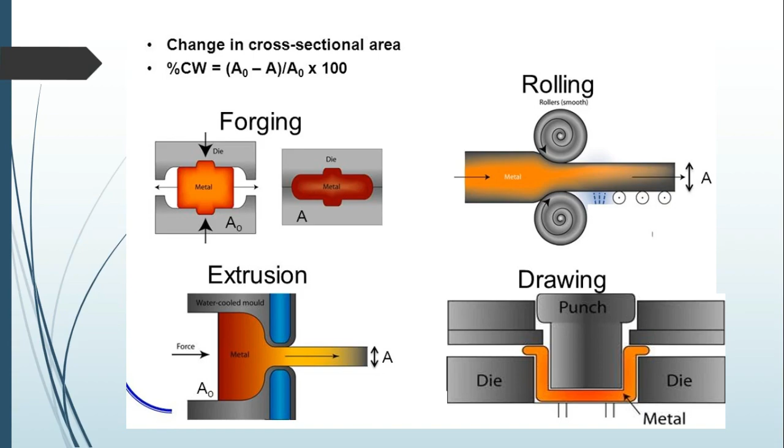And a quick review of the metal forming process. Let me check. First one is forging, then rolling, extrusion, drawing. Remember, in forging we have a die. In between we are placing the metal. Okay, and you see the initial and final product. The shape is getting changed, but the material amount we have taken is the same amount. There is no wastage. Okay, this is the thing I want to convey to you from these slides. And for making these types of changes we have various types. One by one we will see.

Now before going to forging, I want to give the practical photos of where and how we are doing the forging process. You may see the first figure, and the second one is manual, the third one is automatic, and the fourth one is also automatic, and the fourth one, if you see, is one of the automobile engine components. I will not tell which component it is. Please go through the internet or refer to the books and tell me what that component is, and also you should know what is the specialty of this component where we are using it.

Okay, right. Next one, and most probably you guys may have seen this thing. Yes, a sword. When you're watching the Lord of the Rings and some other movies, the very old Asian movies, most of the time they will use forging to make the sword. Why? Because when you are striking another enemy, huge impact forces will come. Your sword must withstand the huge impact. So forged components always withstand impact forces, and there is one small beautiful physics behind it, and I will try to explain it at the end. If not, it is your responsibility to check out what is the science behind it and what is the beauty of forged components. Okay.

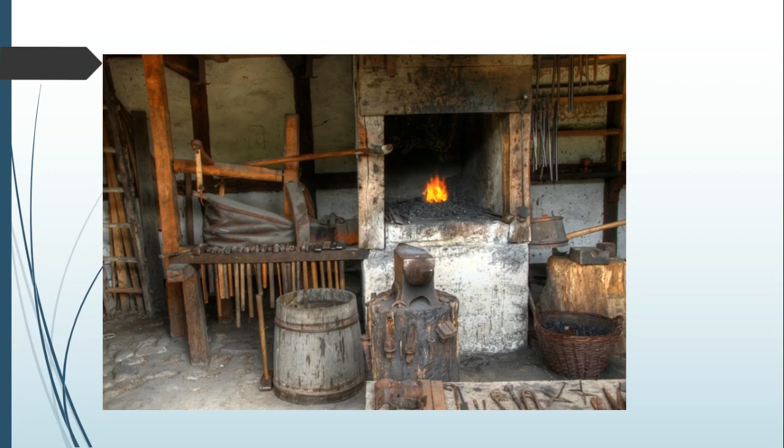Now we have components like hammers and an anvil, one small furnace, or the furnace is not available here. For making the instant heat we have some options. Oh, right. So what is the correct terminology? Find it from the internet. And tongs, you can see here we have a variety of tongs, hammers, anvil, and where we are going to heat the metal. Most probably we have one open hearth furnace, or you check out what the thing is and what its input is, that also you have to check.

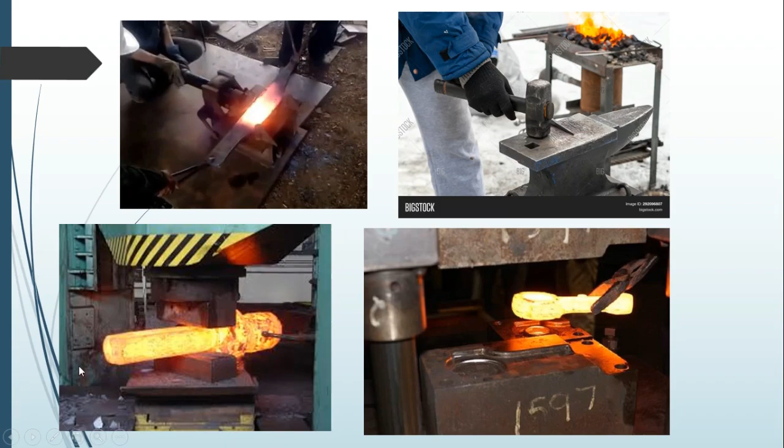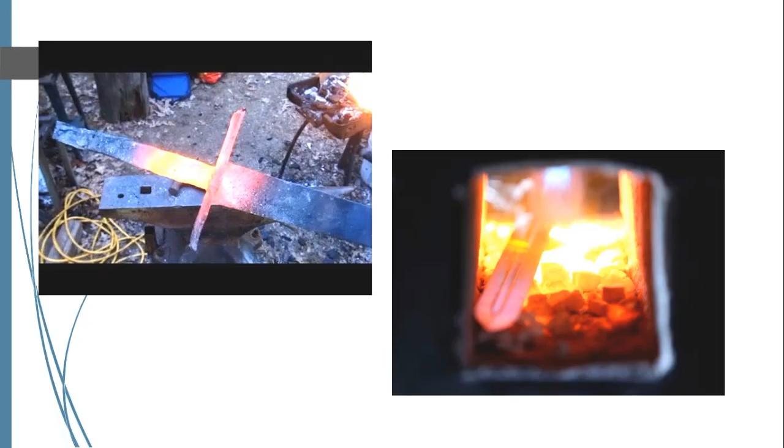Okay. Now these are called tongs. You can see different shapes of tongs are available, because in the previous slides you have seen that components are somewhat different. You see here a somewhat thin and lean component. Here you can see a square shape and complicated shape, etc. To hold this thing we need tongs, because the material will be red hot. You can see it is red hot. You cannot use your normal hand to hold this thing, and you cannot use any gloves to grip it. So we need something different, which should be able to support the forging process. That is nothing but tongs, and for that we have different types of tongs.

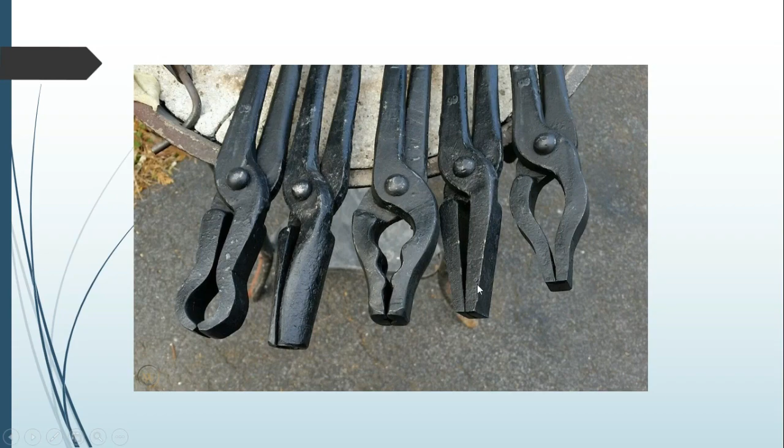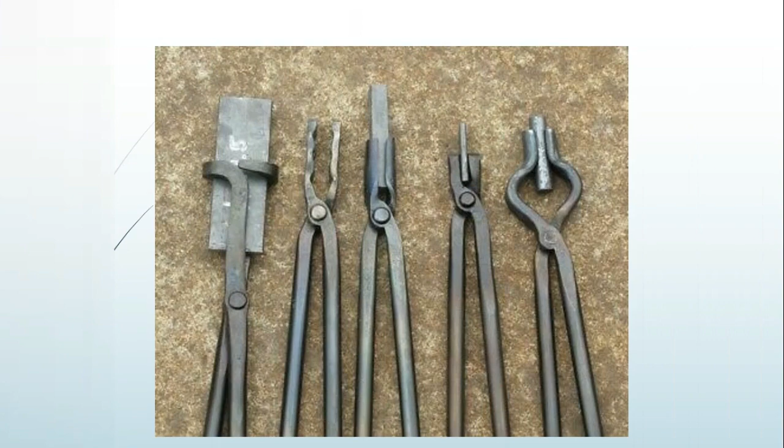These are all different types of tongs, and you can see the close view of the tongs, and they are able to grab various types of materials. And let me check the next video clip. You may have some ideas. Absolutely, you can see flat, rectangular, square, not circle, cylindrical components are available. Not only this, when you are going to do some bending operations, we have different types of hammers. When you want to do normal flattening, you also have different components.

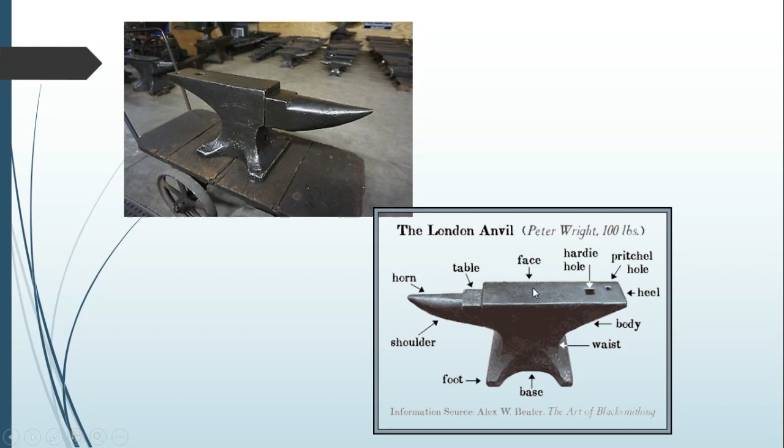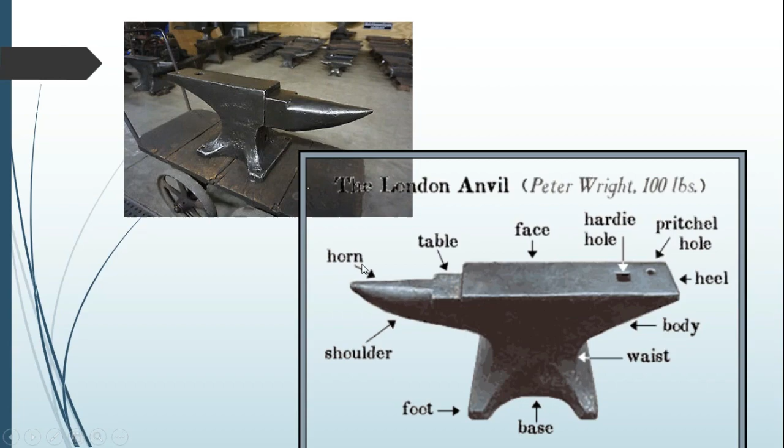Okay, the major thing is the anvil. This is the thing we mostly see in the blacksmithy lab, that is the anvil. We have different portions available. These portions are used to make complicated shapes. Suppose you want to make an S hook, you can make the bend over here, and you can use the hand to make the initial bend. Then you can place the workpiece over here, and you can give force so that it is perfectly bent. Okay. So these are all the things, and we have various parts: base, foot, shoulder, horn, table, heel, body, etc. Okay, and some of the hammers.

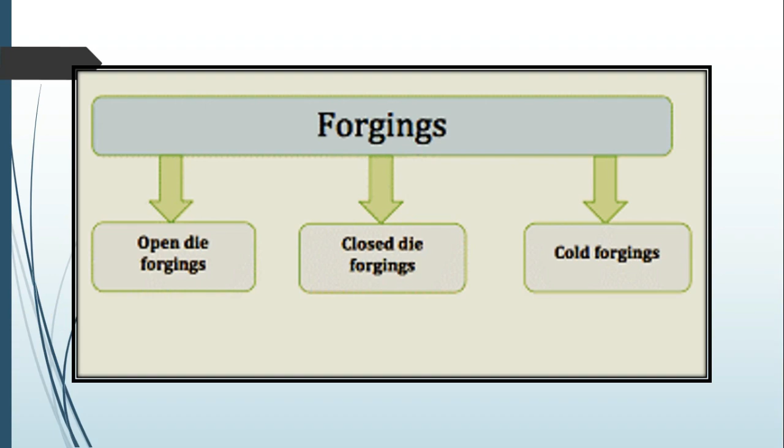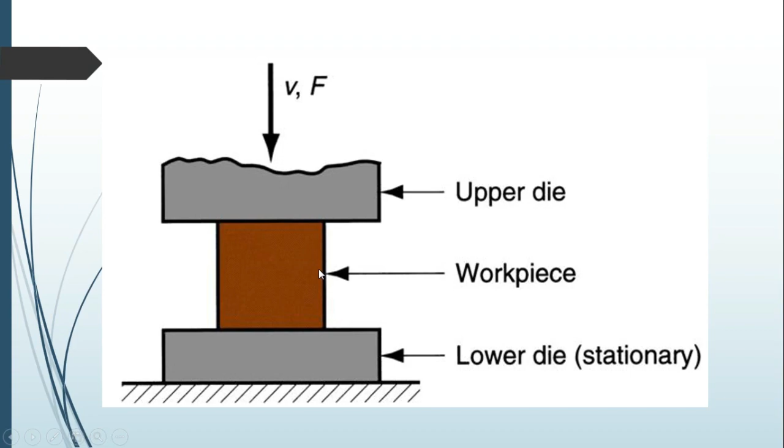And there are 3 types of forging available: open die forging, closed die forging, and cold forging. And apart from this, we have another 3 more classifications also. We will see, it depends upon your book, but everything is categorized under this only. Now, open die forging means there won't be any closure. See, this portion is empty. Here also it is empty. Whenever you give the force, it will deform. That's it. Finally, we can take it. The piece is placed between the upper die and lower die. Right? Got it? So, open die forging will be like this.

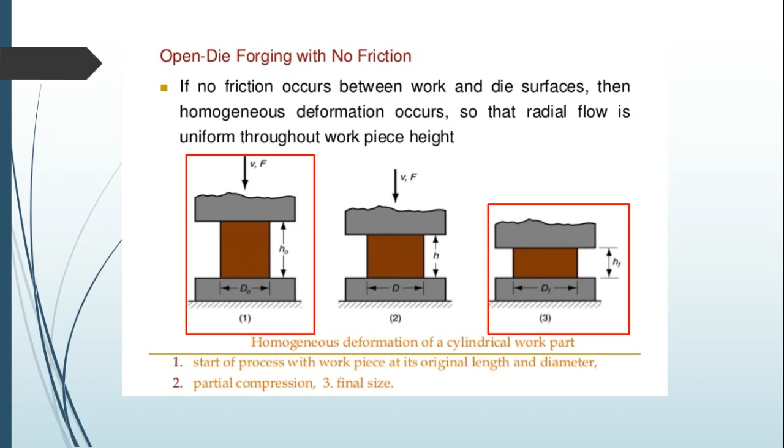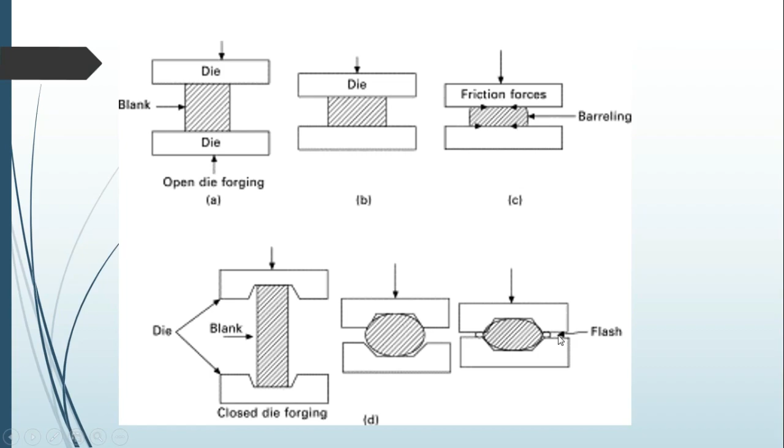So, initially it will be H0. In between it is H. When you are finishing the component, it is HF. For your better understanding, I can show that. See, there is no material wastage. The shape of the material, from the initial workpiece to the final finished product, is changed. That's it. Now here I have one more example, but here we are going to focus on closed die forging. You can see open die forging, this is closed die forging, and this die portion is going to close the path so that no metal will come out. If extra metal is available, that will come out as flash because of the huge impact.

Now, to make it automatic, we have the forging press, which does the same operations. First we have to hold it, then give the force; it will come and contact the workpiece, and by the third attempt it will give a perfect workpiece or output.

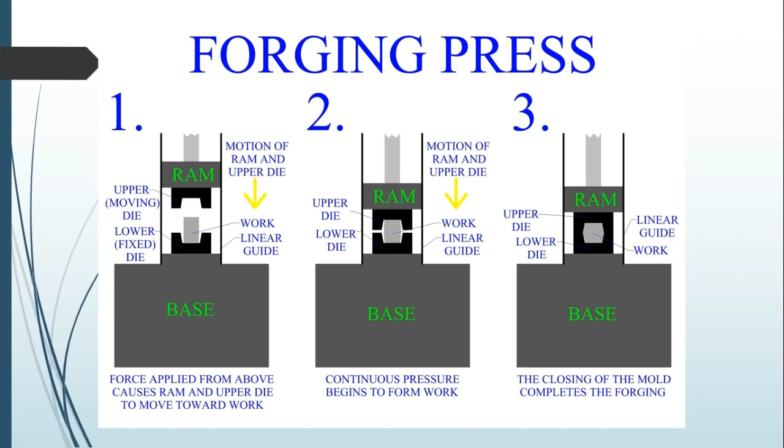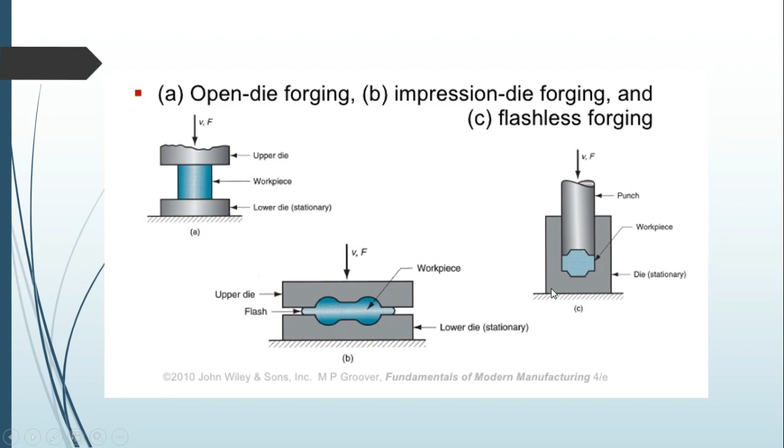Similarly, we have open, closed and flashless. If you see the difference between closed and flashless, you will understand what it is. The material cannot escape and it will be fully deformed into perfect shapes depending upon the punch and die shapes. And we have some complicated shapes like this.

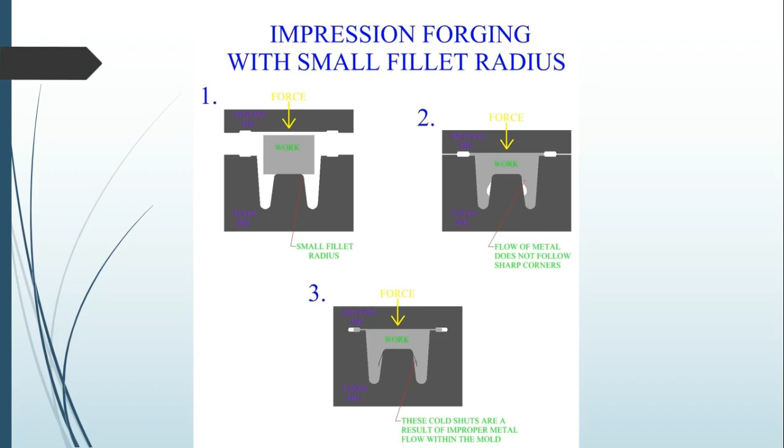If you don't know what a cold shut is, just go to casting defects and rectifications; I have clearly explained it there. And why am I putting these slides over here? Students, we can make any complicated shapes, but you should know the design for manufacturing aspect ratio, so that you can take the exact amount of material and fulfill whatever you want.

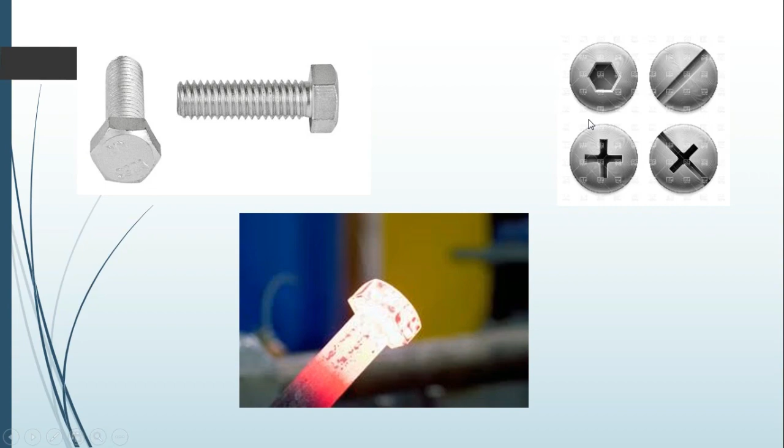Now another thing is the bolt. Nut and bolt we use every day, and this is the bolt where we put the thread, and this is the bolt head. You can see it is in the red hot stage, and we have different shapes depending upon the Allen key, screwdriver, square driver, etc. How are we making this profile? That process is called upsetting and heading.

Upsetting is nothing but: first you take the piece of material and grab it, and it is still hot. Don't say that it is at room temperature, it is hot. Next, after gripping, we have to check how much material we need. After that, we move the punch with high velocity and force, so that the material will be deformed into this exact shape. That's it.

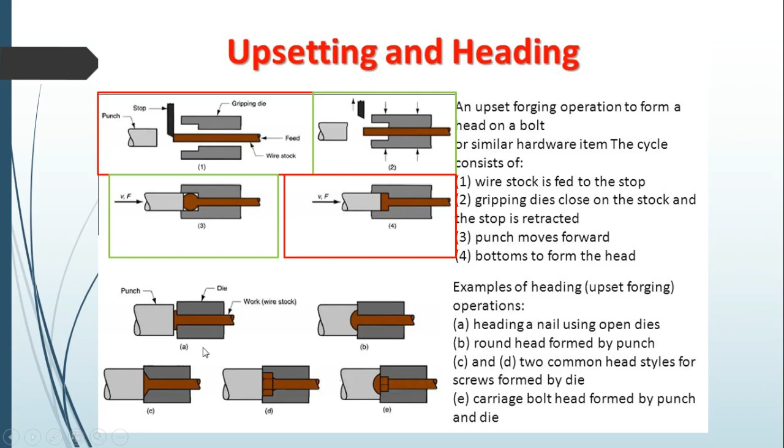Similarly, we are going to make the heads for the nut and bolt. Different heads I have shown in the previous slide. Similar head shapes will be placed in the punch, and according to that we get the heads.

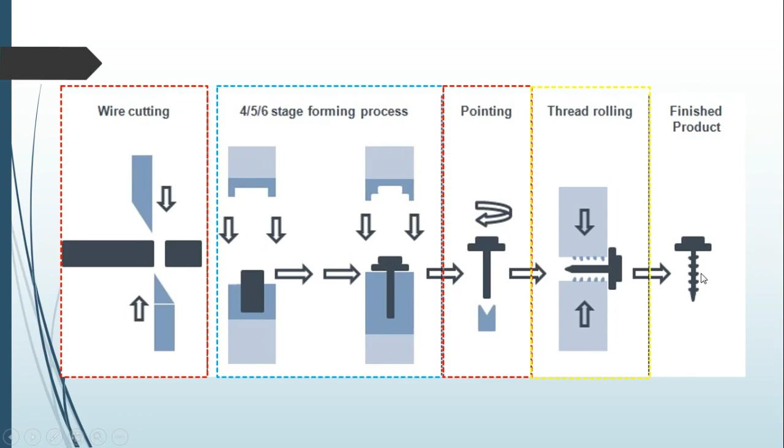Now, in detail, here is how we make the bolt. Initially we cut a small portion from the wire, then place it in the appropriate punch and die. After that the die comes, the punch comes and makes the required shape. It is taken out, then pointing, then we go for thread rolling. Finally, a bolt is in your hand. The same process for different types of heads is available over here.

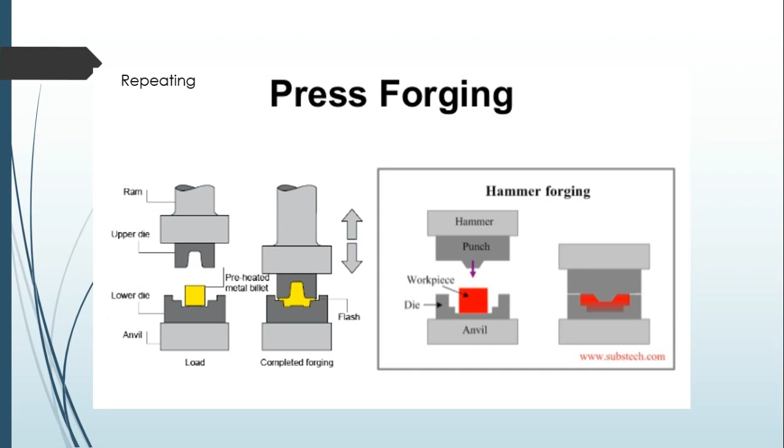Press forging is also one of the repeated topics we already discussed. If you want, you can use this image for better understanding. And here, impact extrusion. Once you see this shape, you may identify the product of this process. There is an impact punch; when you have a piece of material and drop it from some height, it will come and close it, and finally we get some shape. You may guess what product it is. If you guessed, you are brilliant.

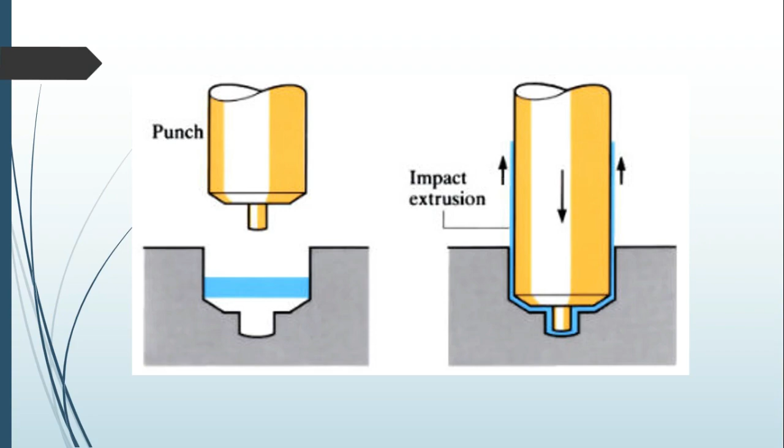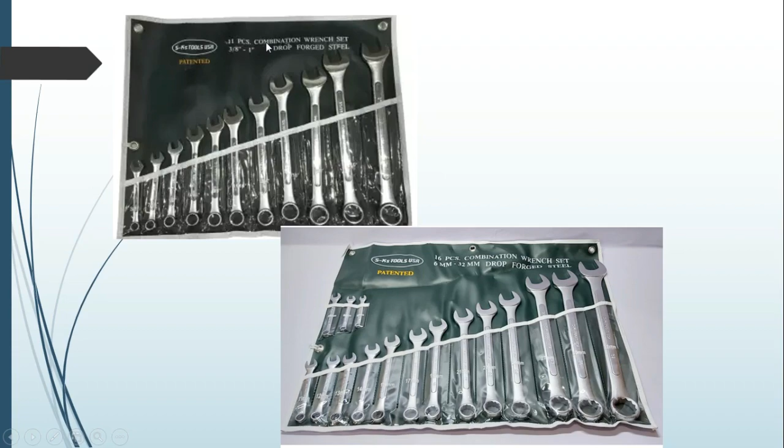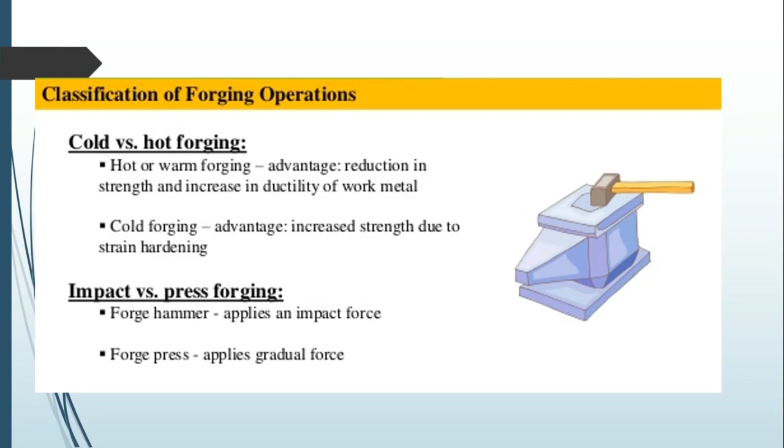Another thing is spanner sets, which are also made by the forging process, and you can see it is drop forged steel. So every component has its own strength. Cold versus hot forging: when you process well above the required temperature, it is hot; at normal temperature, slightly above room temperature, it is called cold. We already discussed the initial rolling process; the same applies here. Some other processes and components made by forging are also given.

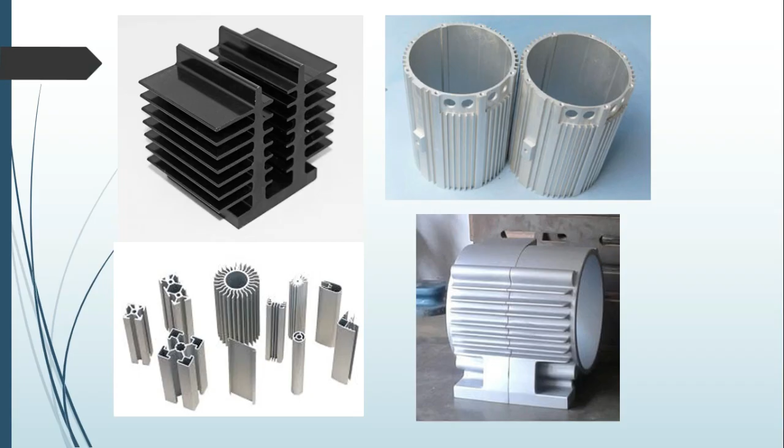I asked one question in the beginning: what is the specialty of a forged product? When you take some quantity of material and keep pushing and reducing its area, making a smaller, compact piece, what will happen? The space between grains will be reduced and they will be close to each other, more attracted to each other. So it can withstand more impact.

That is why the hammer you use can fix a thousand nails in your home. You got it? That is the specialty. The density of the material will be higher; even though it's a small component that came out of forging, the density will be high.